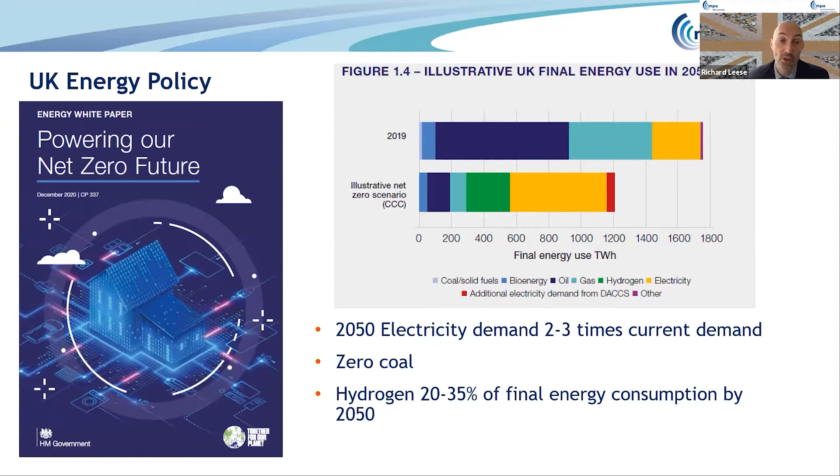Last winter, we saw the Energy White Paper set the scene for the transformation of the energy system. It outlines how by 2050 our coal use will reduce to zero, and how hydrogen as a fuel will go from pretty much zero to 20 to 35% of final energy demand. As transport and industry electrify, the power grid will need to be between 2 and 3 times the scale of the current grid. That's quite a staggering change in just a few decades.

The policy drivers and the need to get to net zero mean big changes for energy intensive production processes like cement and lime. It means changes to fuel sources for the processes, for transport and machinery, but it also means changes to the carbon profile of power consumption and having to deal with the consequences of a system with higher levels of intermittency as a result of renewable energy, and a system where increased demand side responses are needed to modify consumption patterns.

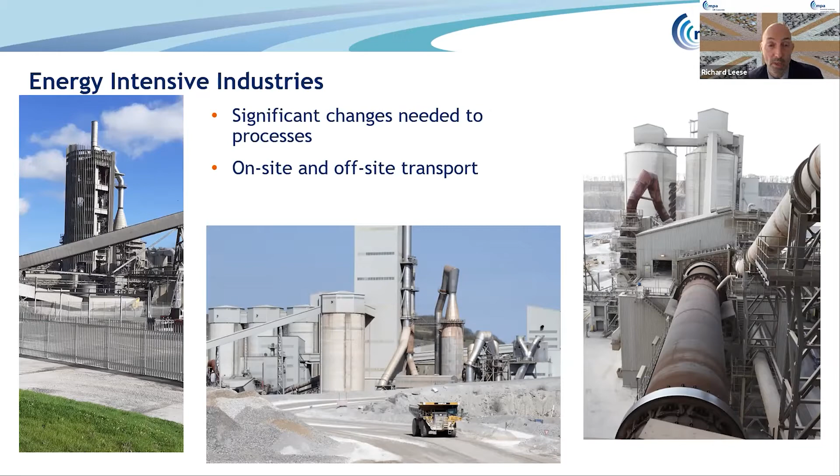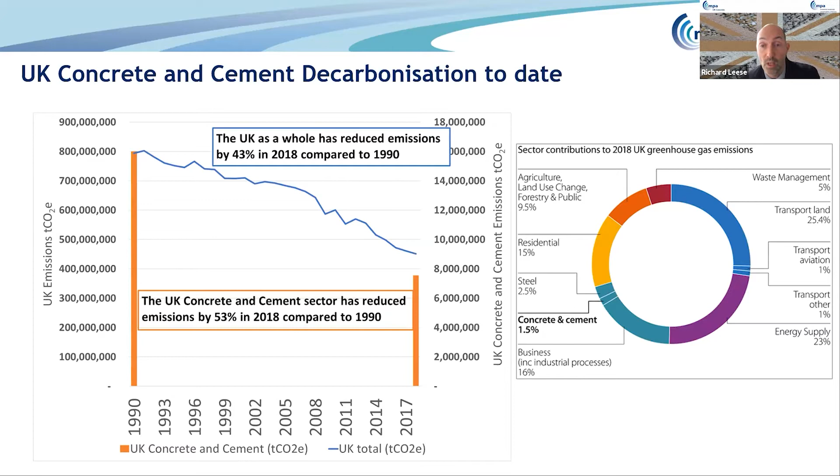The cement and concrete industry roadmap to beyond net zero outlines how that 1.5% becomes zero and how we can contribute to emissions reduction in other sectors. So in October last year, MPA launched that roadmap. So it's the UK concrete and cement industry roadmap to beyond net zero.

It represents a significant milestone for the cement and concrete sector, and it clearly sets out how the sector can contribute to and even go beyond net zero by 2050. It identifies what is needed from industry, but also government and other stakeholders to get there.

It's important to recognise that this is just one of the possible routes to net zero, and as some technologies develop and we learn more about the potential of others, things will change over time. So the annual version of this chart to 2050 looks quite different.

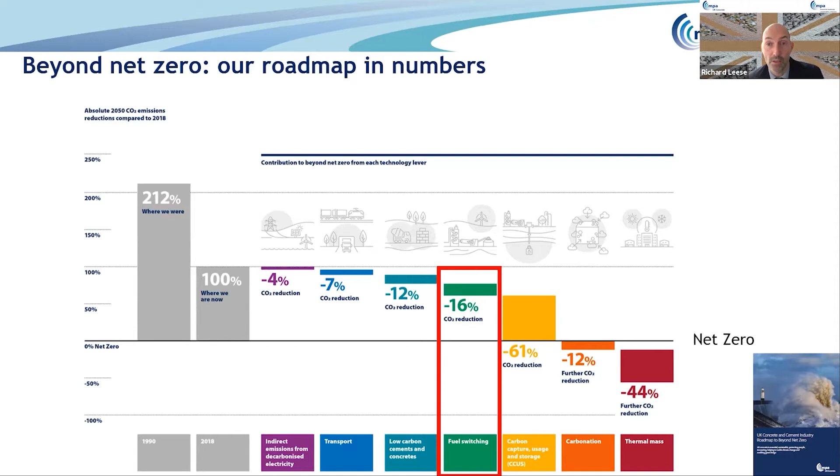Fuel switching is one of the major contributors to the overall net zero journey and is one of the levers that we are and can pull on right now. I'll outline what we're doing in terms of fuel switching and some of the fantastic innovations being made. You'll often hear in the media that globally the cement sector contributes 7% of global emissions. However, in the UK, as I said, that number's 1.5%.

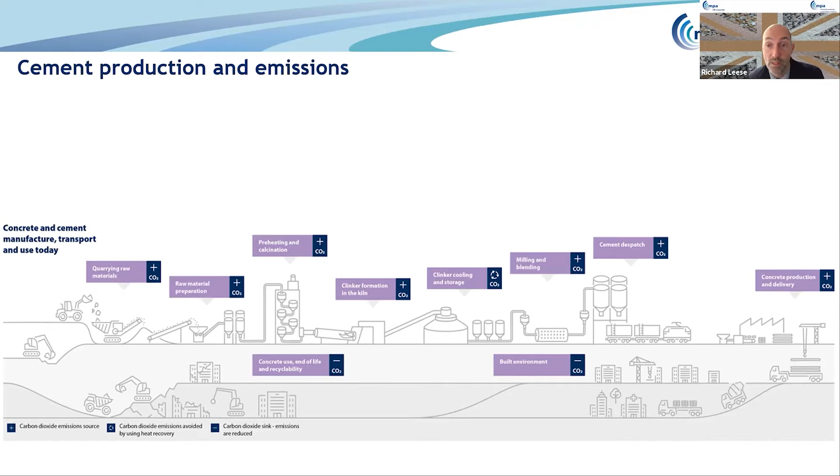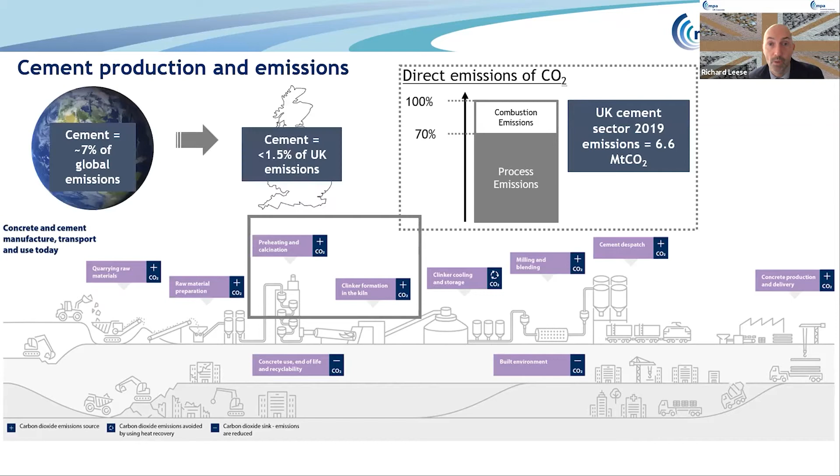So as you can see, with total emissions of 6.6 million tonnes, a net zero fuel mix can reduce emissions by around 2 million tonnes annually. That's about 750,000 homes. There's all the information popping up. Traditionally, cement manufacturers relied on fossil fuels like coal and petcoke. However, since the 1990s, fossil fuels have been gradually replaced by waste-derived alternatives.

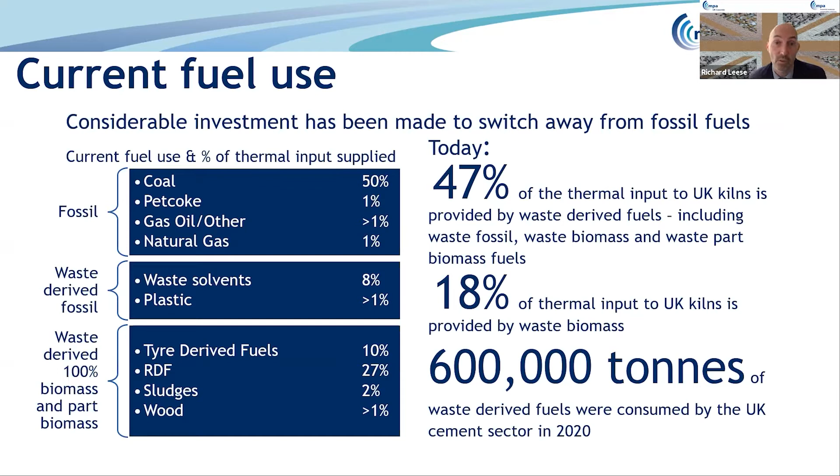In 2020, 47% of the thermal input in UK kilns was provided by waste-derived fuels. That's 600,000 tonnes of waste and equivalent, and that leaves about 500,000 tonnes of coal in the ground each year. Around 18% of that thermal demand comes from waste biomass sources, which is important in the context of net zero, as biomass sources have already undergone a use or a function in the economy.

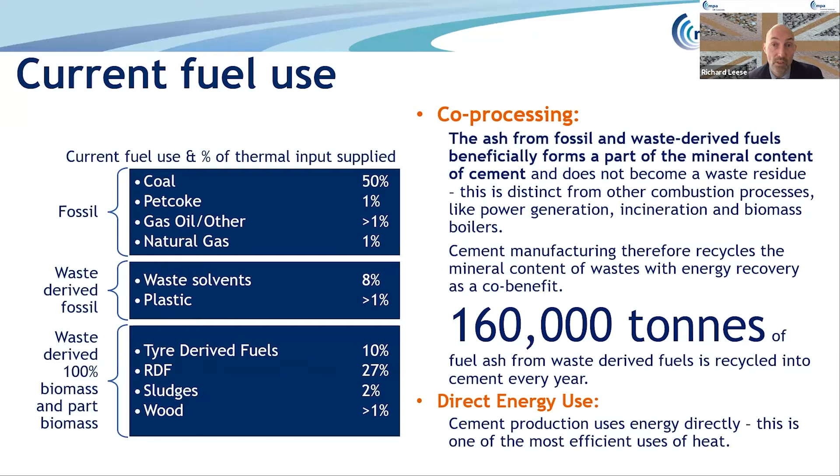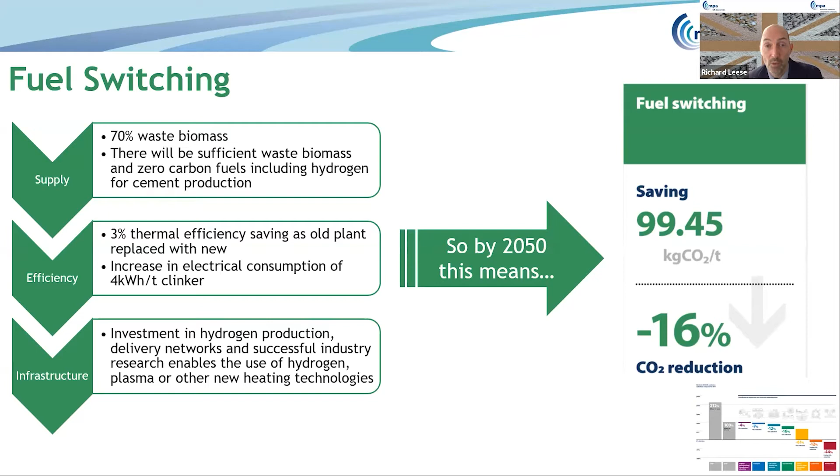Fuel use in cement manufacture has a dual purpose, the energy value, but also the mineral content. And each year, around 160,000 tonnes of fuel ash is essentially recycled into cement. So returning to the roadmap and the role of fuel switching, a considerable amount of fuel switching has already been achieved. Our roadmap models around 70% waste biomass fuels and some thermal efficiency savings to get where we want to be. The roadmap doesn't assume that all this can magically happen.

A series of enablers are necessary to help deliver it. The sector needs support to access waste biomass. This has to be equivalent to that received by other consumers like power generation. And we await with interest the government's biomass strategy due next year. The production of hydrogen via low or zero carbon means is required at a cost that won't affect the competitiveness of the sector and in quantities that make it viable as a fuel use.

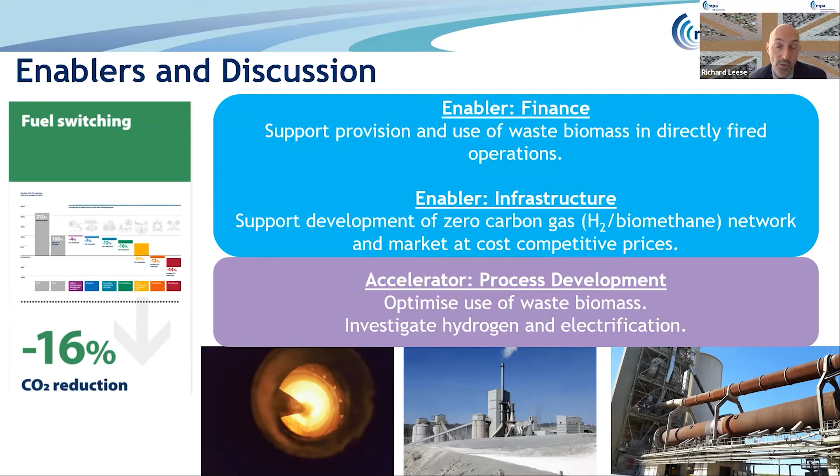So we're not just writing about the plans we've got for fuel switching, MPA is delivering on it. Our innovation programme is in full flow. And just a few weeks ago, we achieved a world first. The journey started a few years ago with a feasibility study to investigate an idea that I had. And that idea was to net zero fuel a UK cement kiln with a combination of biomass, hydrogen and electrical energy. We carried out a feasibility study, and that concluded that it was theoretically possible.

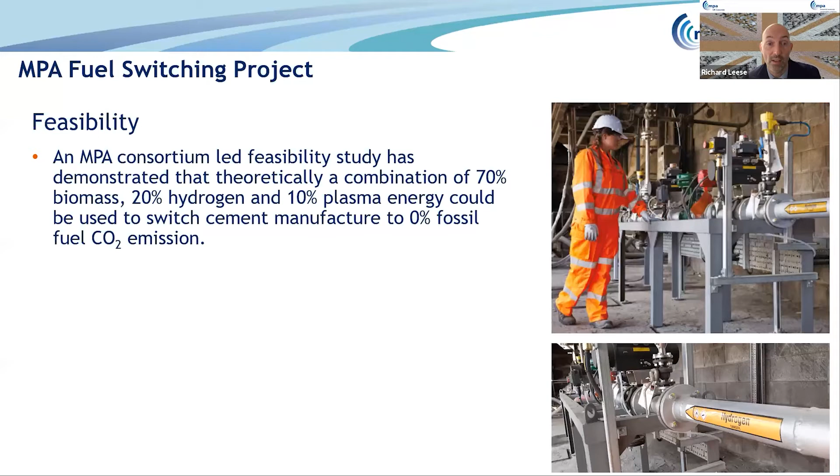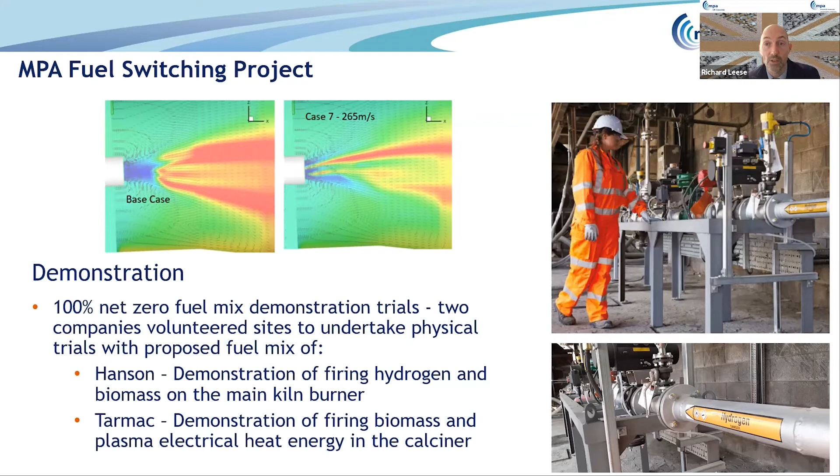The feasibility study set up an application for government funding to demonstrate the theory. The demonstration is split into two parts, a trial of hydrogen and biomass at the Hanson Ribblesdale plant on the main kiln burner, and a trial of biomass and electrical plasma energy in the plant calciner at Tarmac's Tunstead plant.

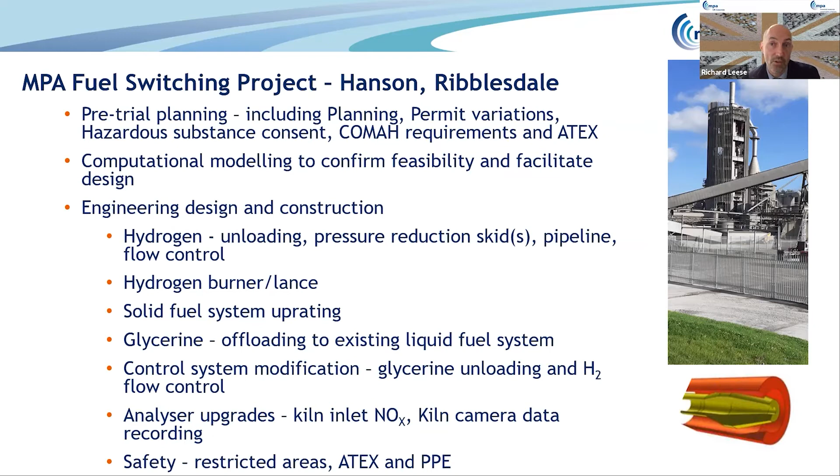MPA's main project partners are obviously Hanson, Tarmac, CINAR for CFD modelling, and VDZ consultants from Germany. And they deployed a number of engineering changes at Ribblesdale, where we've just recently completed the trial: changes to the biomass delivery system to accommodate glycerine, and analyzer upgrades to capture any potential alterations in the kiln operation from the new fuel mix.

The demonstration included four fuels: coal, as we dropped off coal, hydrogen, meat and bone meal, and glycerine. Glycerine was delivered and stored in road tankers and delivered to the kiln using the existing waste liquid fuel system. Hydrogen was delivered by road, and at full flow we had 9 trailers over a 5-hour period. That's because you only get 250 kilos of hydrogen on a trailer.

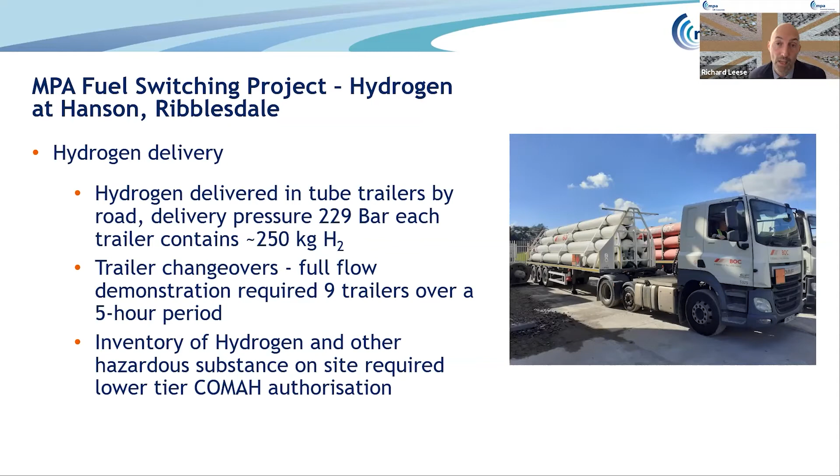Obviously the safety precautions were extensive and thorough throughout. We needed a whole new manifold system for the hydrogen delivery. So this was the moment when we achieved proof of concept to net zero fuel the kiln main burner with a fuel mix of 39% hydrogen, 12% meat and bone meal and 49% glycerine.

It was truly a groundbreaking world first achievement in Lancashire, with a small number of happy and emotional people to witness it. And I say emotional because they knew that it was a real game changer for the industry. And there was the odd tear in the eye, I have to say.

So thank you. There's still obviously a long way to go before we start seeing 100% use of zero carbon fuel, especially in large volumes, including large volumes of hydrogen. But what we've seen in the cement industry just recently are important first steps. And we know there's much more that government needs to do, including funding for fuel switching. We know that there are some new funding streams available for that.

So hopefully that's given you an insight into how the UK cement industry is dealing with the energy transition and switching away from fossil fuels to lower carbon and net zero fuels.

Question from the chat. According to the American Chemical Society, there's a possibility that adding more water vapor to the atmosphere by burning hydrogen could produce a negative feedback effect. Is it actually a thing, and should we be worried? Water vapor is a greenhouse gas. It's probably one of the most important greenhouse gases, in that it's water vapor that keeps the atmosphere relatively regulated. But it's a balance, isn't it, between the carbon content versus other environmental impacts. I'm not seeing at the moment that it would be a barrier to using hydrogen.